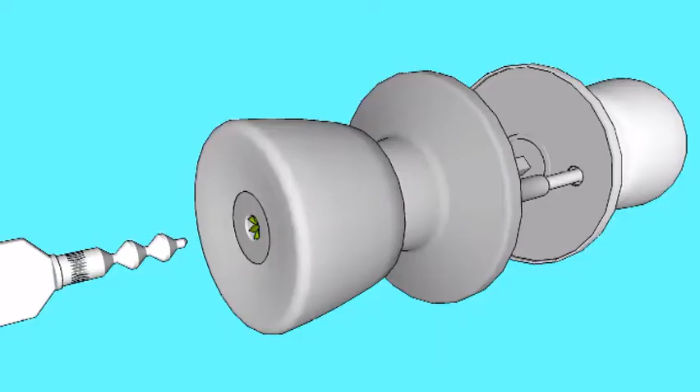There are many possible configurations of this new patented lock design, but here's what it would look like when integrated into a typical doorknob. You can see that the circular keyway remains covered by the green engagement discs when the key is not inserted.

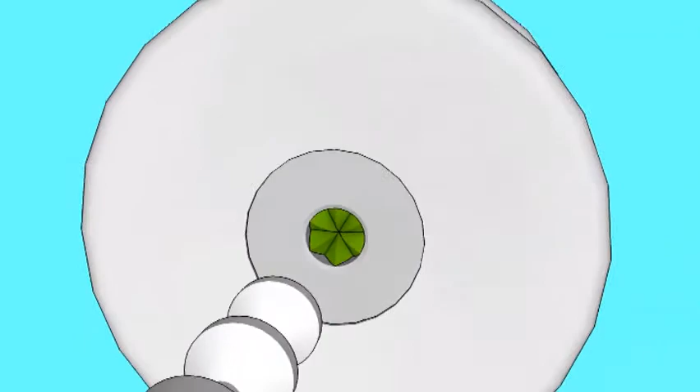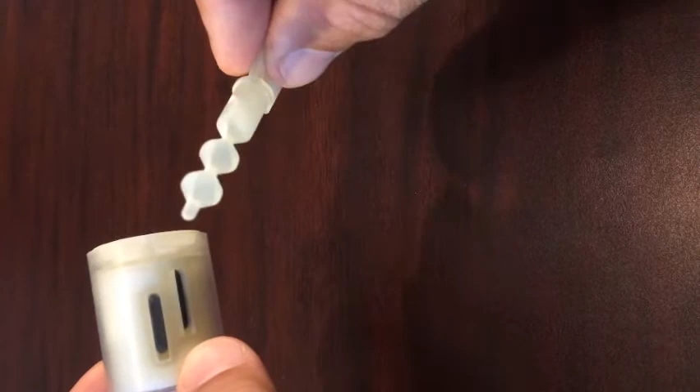Here's a prototype whose components were all printed from resins using stereolithography. In order to prove functionality for all cut combinations, adjacent maximum and minimum bitting cut heights were used, which you can see by looking at the key profile. The version in this video has the locked and unlocked states positioned 90 degrees apart.

You can see that the key is inserted in any position and engages the inner cylinder, which is then rotated, and the key can be removed directly from the lock's new state. The process can then be reversed, returning the lock to its original state, and you'll notice that the inner and outer cylinder, once the key is removed, are locked relative to each other.

Here's an exploded view of the prototype version that was just demonstrated. This is just one of many forms in which the patented concept can be implemented. The key has 6 points at which the 3 blue inner locking vanes would contact its surface. Each inner locking vane would be analogous to 2 key pins in a standard pin tumbler lock.

There are 2 sets of 3 red outer locking vanes for each state, locked and unlocked, in which the key may be removed. They would be the equivalent of the driver pins in a pin tumbler lock. The green engagement discs are housed in the inner cylinder and cover the keyway opening when the key is removed.

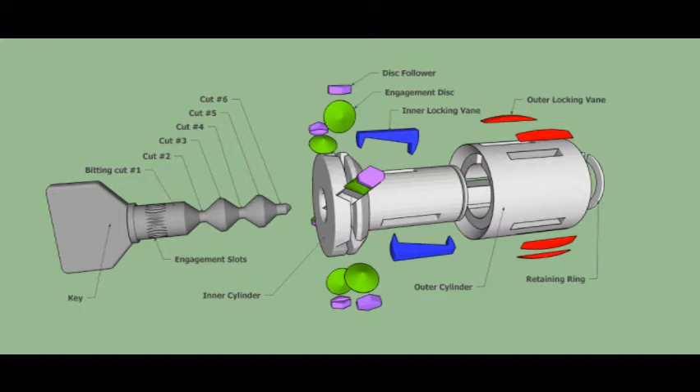The discs are moved radially outward as the key is pushed in and engage the grooves cut into the shaft by the head of the key. When the key is fully inserted, it allows the key to rotate the inner cylinder. This view shows how the green engagement discs engage the key when the key is fully inserted.

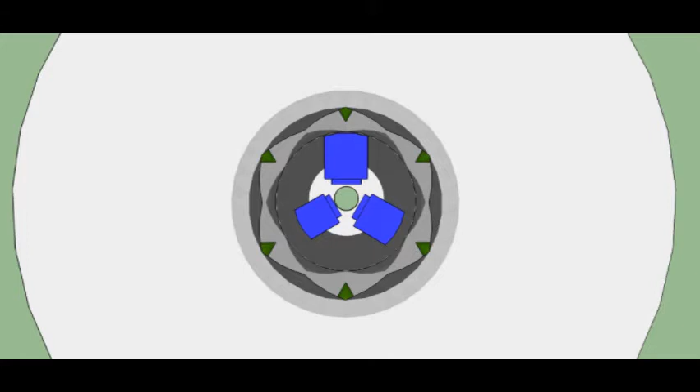Here's a view looking into the keyway with the engagement discs pushed out as if a key was inserted. The discs not only engage the key to operate the lock, but also keep the elements and other contamination out, as well as making efforts to pick the lock much more difficult.

As you can see, the 3 inner locking vanes are each offset 120 degrees around the circumference of the keyway. The tips of the vanes extend into the keyway where the contact with the key is made. In order to rotate the lock, each vane must be positioned correctly at both ends simultaneously for all the seams between the inner and outer locking vanes to line up with the shear line between the inner and outer cylinders.

This configuration makes all current forms of non-destructive lock picking ineffective against this design, including raking, individual pin manipulation, or lock bumping.

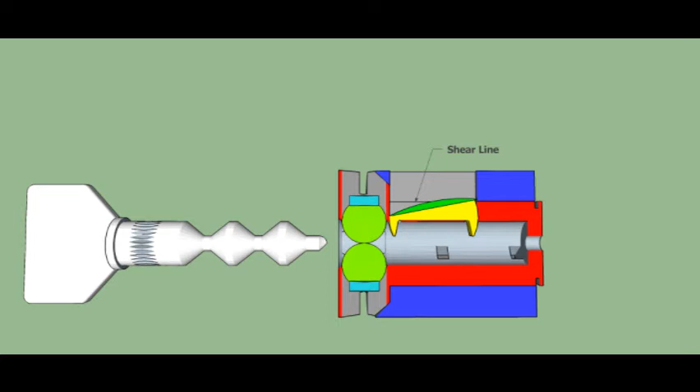This shows a cutaway view of one pair of inner and outer locking vanes. The blue represents the cross-section outer cylinder, and the red is the cross-section inner cylinder. You can see that with no key inserted, the vanes cross the shear line and prevent rotation of the lock. In this view, the correct key is inserted, which aligns the vanes, allowing for rotation.

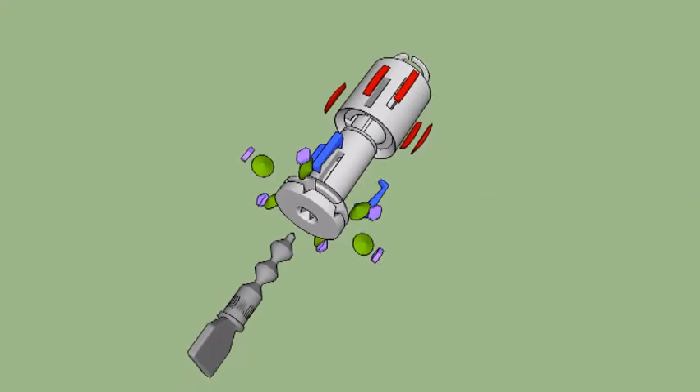The major advantages of this new design are the ability to insert a key at any angle, needing only to guide the key in the vicinity of the opening. The key can then be turned in only one direction, taking the guesswork out of which way the key must be rotated. Once the key is turned, it can then be directly removed without the need to recenter the key to an original position.

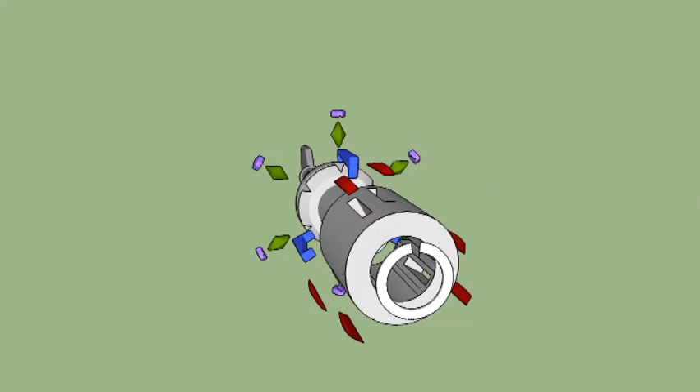It also provides a number of new innovative challenges to those trying to gain unauthorized access by means of lock picking. And from a visual aspect, the design has a radically new look, which opens up endless possibilities for marketing and brand recognition.